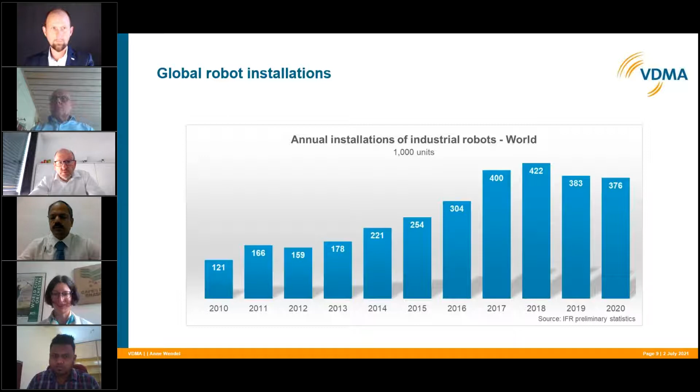New installations have more than tripled if you compare 2010 to 2020. In 2020, as I mentioned, there was a minus 2% due to COVID-19. But it's not as bad as in other industries and other sectors of the machinery industry. So, looking at the customer industries.

Industrial robots can be found everywhere. All major industries rely on robotics, be it in food and beverage, plastics, chemical, metal, or machinery industry. So robotics and automation is globally on a high growth path.

In 2020, something happened: electronics surpassed automotive as the largest customer. Electronics had plus 17% in new installations in 2020. Automotive, as we all know, is undergoing a transforming period, so we had minus 21% in automotive. But in all the other industries, be it food or plastics, we had an increase.

Looking now at robot installations in India — thanks to the International Federation, we have these figures so we can see how the Indian market has developed. Looking at the annual installations in 2020, more than 3,200 industrial robots were newly installed in India. Hence, again, an increase in the operational stock of industrial robots — that means how many robots are working in factories in India.

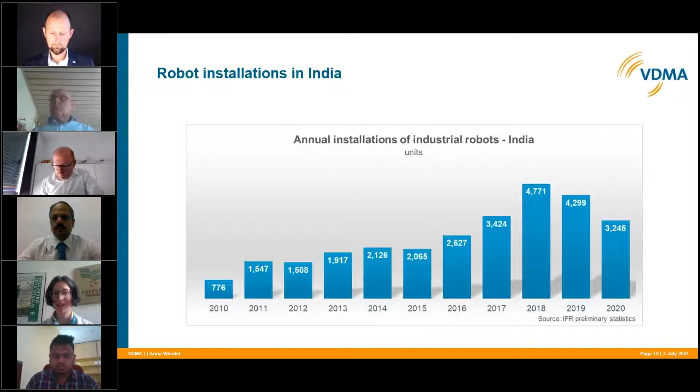That's not the slide I wanted to see, but nevertheless, operational stock, I hope you believe me, has been increasing over the last years. According to the IFR, by the end of calendar year 2019, we had more than 26,000 robots working in factories in India.

And if we look at the customer industries for new installations in 2020: 744 units were installed in automotive, 337 units in metal and machinery, and electronics and food saw an increase in 2020.

Unfortunately, we don't have figures about robotics and automation, about the machine vision industry in India or worldwide. However, I can share with you how the German machine vision industry has been developing.

Next slide, please. Go to the... again, the slide is missing. I'm sorry for that, but I hope you believe me.

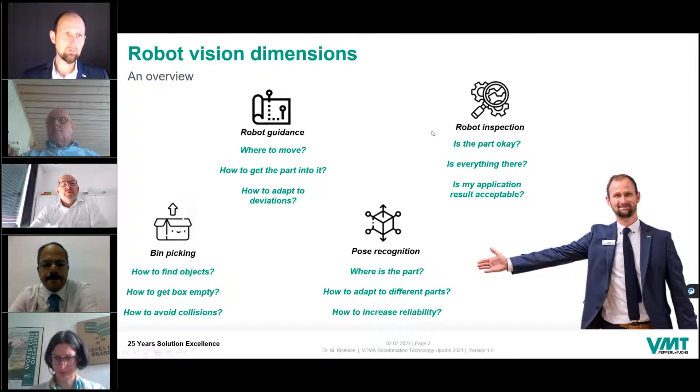So what happens if your parts have different shapes, but your robot path is programmed, and you want to adapt it to the current shape and moving path? And we want to dive into a huge topic about robot inspection, especially talking about 3D inspection. How can we use robot vision solutions to inspect parts? That is the overview, and now we go into it and talk about pose recognition.

Assuming you have a robot cell, a sports car, and whatever object, these examples are automotive because VMT is doing 80% of automotive vision solutions. We do 10 to 15% medical solutions and 5 to 10% general industry solutions. So most examples are automotive, but you can transfer it to any other solution or object that you have.

So we have a nominal position, there's a part. We have a multi-camera system, 3D pose recognition, using several cameras, let's say 4 in the edges of the robot cell, to create photos of an object, to calculate from the photos using markers in the picture - we will see that later - and a mathematical algorithm to calculate the current position of an object which is meant to be the same all the time.

So taking this red sports car, don't want to talk about a Ford Mustang here, but it is one. This is in the nominal position and you did all the robot programming. Everything is working fine with your first car. We call it the golden car. And your application path is fine.

Next car comes into your robot cell, and this car, due to conveyor effects, will not be in the same position. And we have to distinguish here, we are talking about a pose. So a pose means X, Y, and Z, Cartesian position, and additionally an orientation change. And that is very crucial.

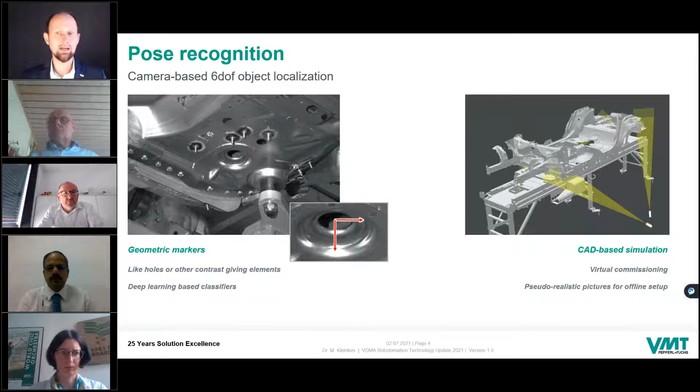You can do that in a CAD-based simulation. That is something going out of the commodity product which has existed for many years on the market, 6D pose recognition, into virtual commissioning, CAD-based simulation. Thus the next car, the next object which you're planning, which you don't produce right now, is fitting the current cell, the current solution, and how much can you do in the office and just load and update when you're on site to get everything running in a very limited amount of time.

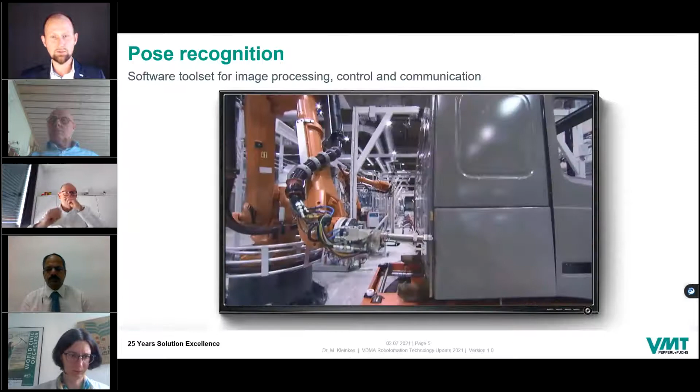And what you see here on the window is software showing these image processing algorithms, lights, cameras which are mounted, and here you see a demo application which we did for a truck manufacturer. For this sealing application, it has to be applied very accurately at the object, and this pose recognition has to be done to find the object in space to really hit, with an accuracy of a millimeter or even less than a millimeter, exactly the right position.

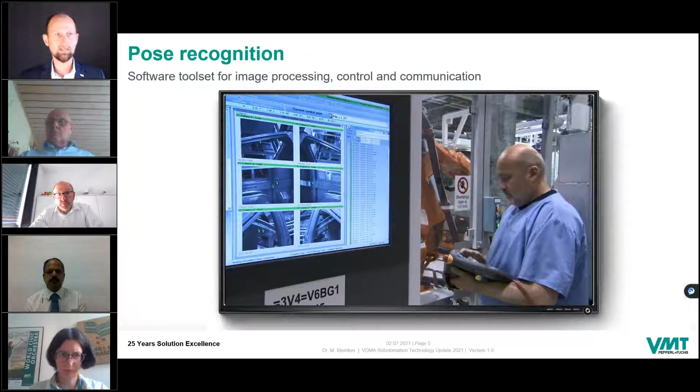And you can see that's a practically running system. From this kind of systems, we've got 1,000 and more running worldwide to do pose recognition. So that's the first, let's say, easy solution approach for modern vision technology.

Now we go one step further: bin picking. If you go to Wikipedia and type in bin picking, some keywords pop out of it. It means computer vision, robotics, end effector, poses, grippers, and all that good stuff. It is still a huge complex problem, and the theory means just take a robot, take your bin, take your parts, use a plug and play software, put a sensor on it, and there you go.

That is not the reality that we experienced. There are certain levels of problems. If you have very easy parts, very good lighting, everything is like planned in theory, it's easy to do, but have a look on that.

Those are parts for a German manufacturer of cars, and it is glossy, shiny, chaotic. These parts are in every possible orientation. If you want to grip them magnetically, they stick together and you don't get them out of the box without any collisions, and that is bin picking.

Bin picking is not taking a sensor, taking a plug and play software, and good luck. Bin picking is a various field of different elements, and that is my key message for this part of the presentation. It means you have to deal with a robot, create a good gripper which fits in the box and fits to the software, and establish your interfaces to your PLC, to your safety environment. You have to make a good cell layout so you have enough space, room for the robot to move properly, to get all the parts out of the box.

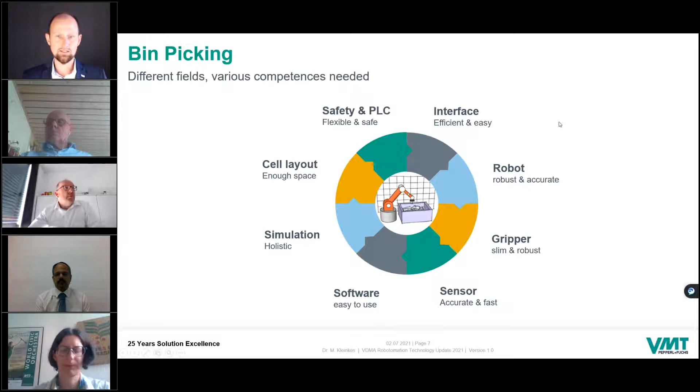To give you a small insight into how we did that bin picking, that is a lab setup with a very easy sucking gripper. You can see there was a 3D fit, and what you see now is a very crucial part: taking a part out of the box and putting it into this fitting element, which has a play of 0.5 mil. That's a very delicate task, because most of the time the gripping process itself is not accurate enough that you can put the part down with the accuracy you see here in the video.

That is one part where these bin picking solutions get very complex, and a good software package, a software platform, is needed to run a bin picking system properly.

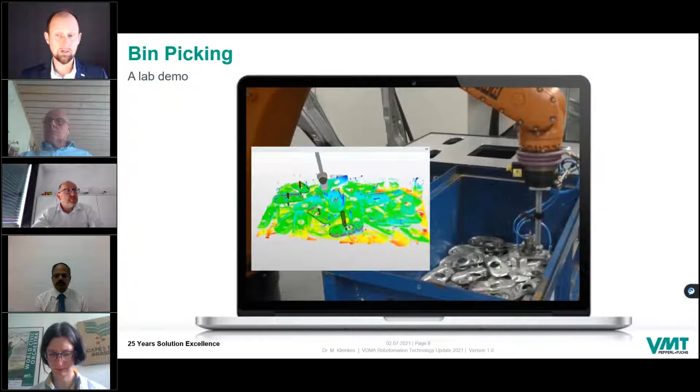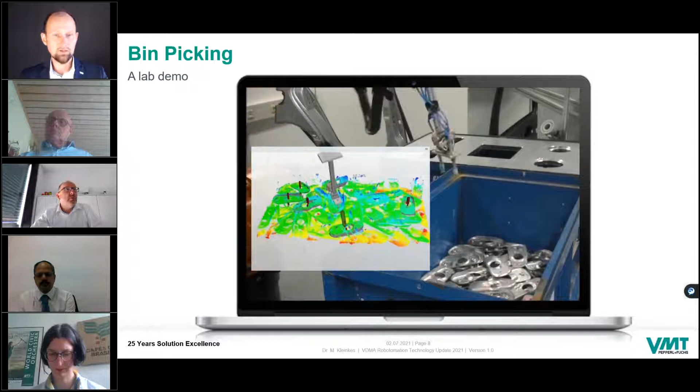What you maybe see is a rotating laser over the bin. So the sensor in these solutions is also an element which decides about success or no success. You need good resolution, you need good light reflection and robustness relation in your sensor. You are not helped if your surrounding lighting conditions are very bad and your sensor can't deal with that, so that you're not able to fit, like you see here in the window, the CAD into the point cloud that you get out of a 3D point cloud sensor to do this kind of bin picking.

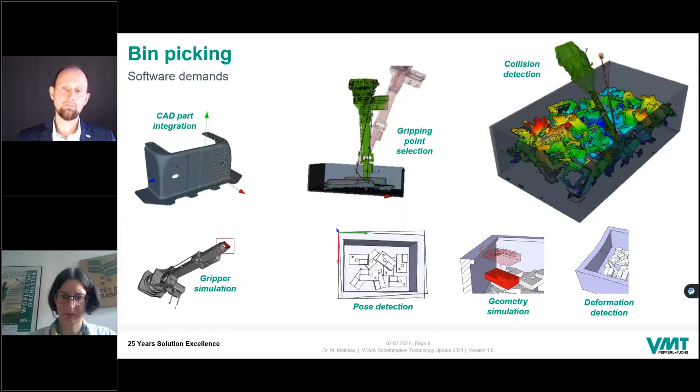That is the basic approach of bin picking systems. There are several points I want to give you. If you think about bin picking, don't just think about can I see the bin and do I have a robot and that's it. It is a huge and multifaceted topic that you should consider.

That is always the equilibrium we try to achieve. On one side, every single problem, every single customer is unique, so unique solutions are preferred. On the other side, you want to approach standardized solutions in vision applications to drop price and get synergy effects. That is the equilibrium we reach, finding the best level between individual solution and standardized product.

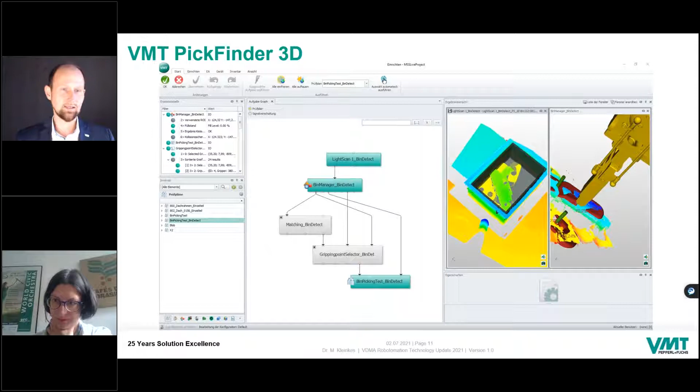Basic platform, one-time software learning, different solutions with the same software platform. That makes it easy to change between different applications while still resting on the same platform, like using Excel on a Windows system while at the same time using Outlook and other software. The platform is always the same.

Jumping to the third of four topics, inspection is something really huge. I would need several hours to explain to you the different elements of inspection that we do. Here I roughly scratch the surface to give you a glimpse into what we do and what modern vision, robot vision, is doing on the market.

What we do there is with the second platform we use. We take pictures and elaborate these pictures with taught-in templates that you can put into the software. We can measure distances, sizes, diameters. We can check positions in relation to the picture, whether it's in the right position or shifted a little. We can read data matrix or barcodes. So all different tasks needed to inspect a complex element.

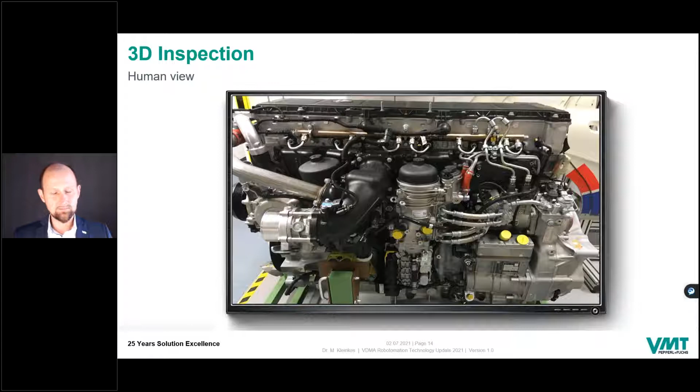So let's take a grayscale camera, a classic inspection grayscale camera. Looks nearly the same, but with a completely different approach. Now we still have a picture, but we as humans have two cameras, a left and a right one. Some of us only have one eye, but most of us have two eyes, so we are equipped naturally with stereo vision and with a huge brain capacity to process what we see.

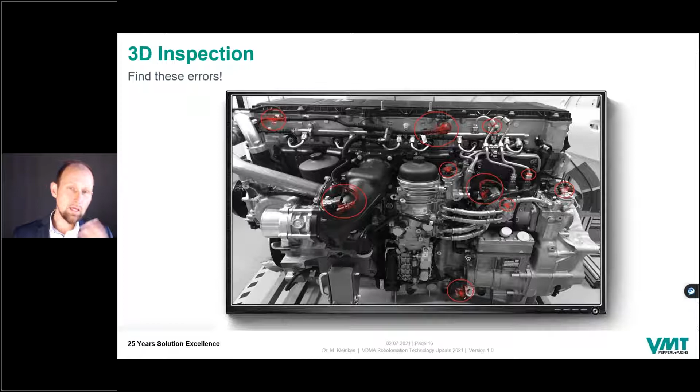And now we dive into the 3D world. If we use a 3D point cloud sensor and take a snapshot of this object—say the first object, which is perfect, which is controlled with a lot of time, patience, and love, we check this part about completeness and everything is fine. This is a golden reference, and the next 200 parts should be looking like this one.

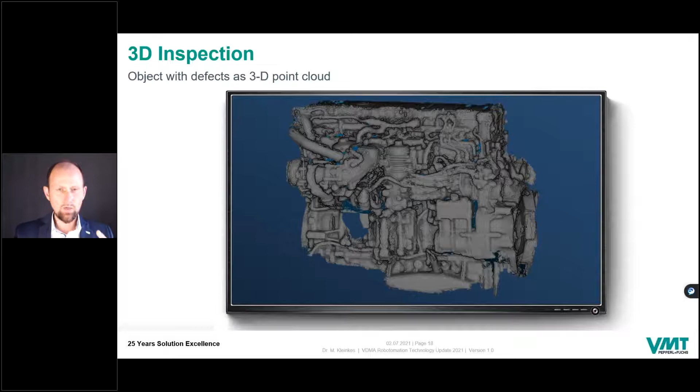You can take a 3D picture, a point cloud like you see here, and for the next part you do the same. This is the next part, looking nearly the same as the first one. Now we bring these two 3D point clouds together. We match them, and then we see where they change in their geometrical size, where we have deviations. And that is exactly what you see here.

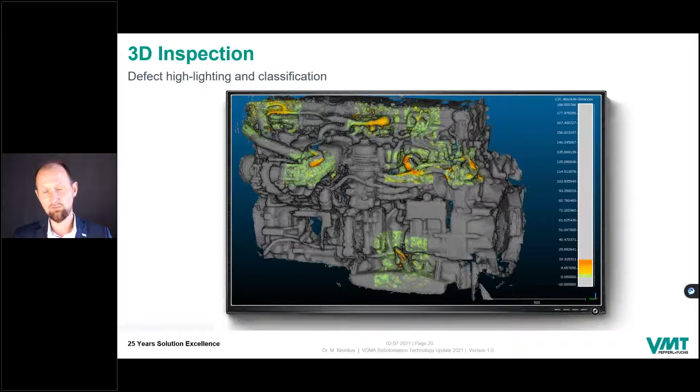But let's take another one, a turbocharger, same problem, 3D inspection. When you begin to rotate the part a little bit—and I hope you see the rotation because of the bandwidth and the presentation here—then you get an impression of how 3D works and how you can highlight areas which are not perfect, which are the result of a complex 3D inspection here.

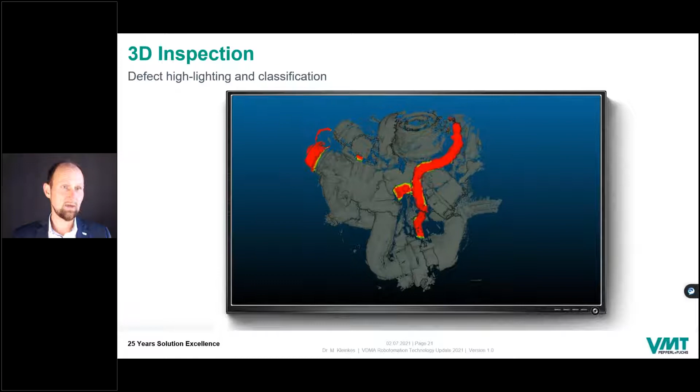That was chapter 3. Jumping into chapter 4, the last chapter, and then I will finish. We need 5 minutes and we are through. Robot guidance.

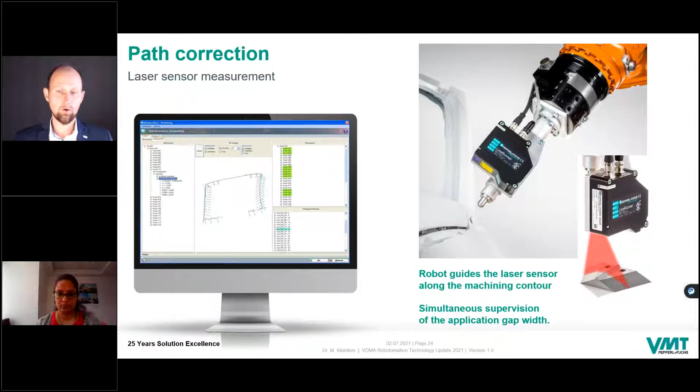And with that tool, you're perfectly able to act agile on every part deforming that comes up into your production process. Look at this, it's a video which doesn't start here.

It's a video where the front hood of a car, which deforms with every car, is measured now. That is the measurement process. It's very fast, pack, pack, pack, pack, pack, just single shots of laser line measurements.

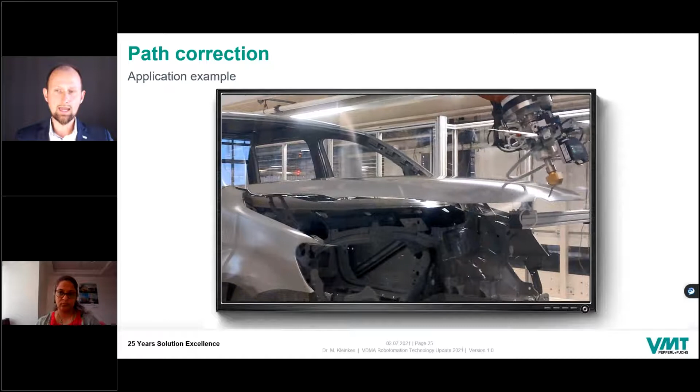And now there's the application. You see the nozzle perfectly going along the hood, and each hood has a different deforming. One millimeter is a lot in that process. Then you begin to scratch the nozzle, and you increase the risk that you break it and stop your process. Breaking is not the main problem, stopping the process is the main problem.

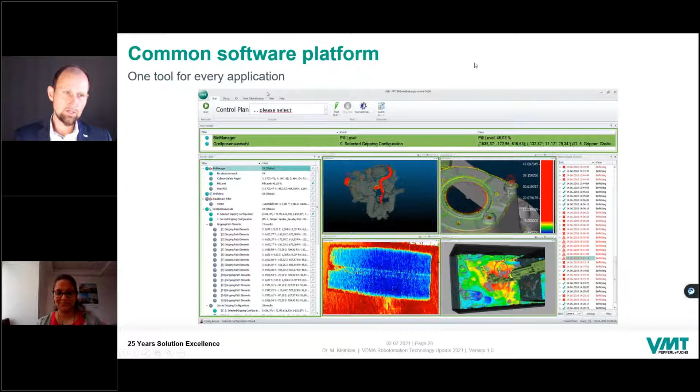20 minutes was the goal, 20 minutes were done. I'm thanking you from my heart for your attention.

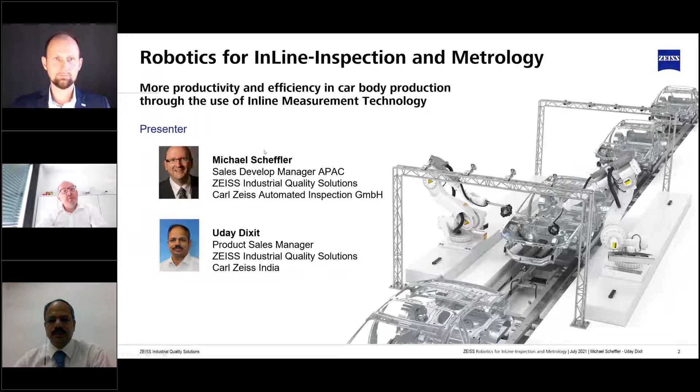As we are short on time, I will already show you the first slide. What we are seeing here is a somehow symbolized representative automobile production site, with different areas having different requirements for quality assurance. We have, for example, the tooling, the press shop, parts production in the body shop, serial analysis, measuring center, body shop, paint shop, and assembly. You can imagine that in all these areas we have really different requirements.

And this you can, of course, not solve with one single sensor. So what I want to show here is that we need a certain construction kit or tool kit of different sensors which can be applied on robotics for those different applications. We have, for example, an AIMax sensor for feature measurement, AIMax cloud sensors. We will show you AIMax twin sensors for the application of flush and gap measurement, AICell trace where we can also do correlation-free inline metrology. We need really different strategies for different manufacturing processes along the complete process chain in the car body manufacturing.

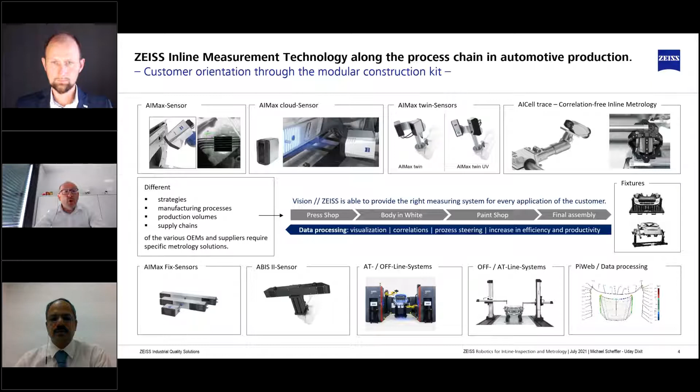When we go through this, I will not go too deep into different applications, but give you an overview. I will do it in the form of case studies, and the first one will be a sort of geometric measurement for inline inspection.

So when you see automotive production, this is the inner of an underbody. The importance for the inline inspection in this area of production is to assure later assembly. The features that need to be controlled here have function-oriented dimensions, because those are critical features which need to be controlled 100% on each car. If any deviation to the defined tolerances is detected on the line, the line will be stopped, or it will be sorted out for immediate rework.

But also, as we heard in the presentation before, it is better not to stop the line. That means with some statistical analysis, you can even recognize trends in your production, and then you can give a trend alarm. Even before a failure occurs, you can optimize your production processes, and you can also do some predictive maintenance on your production.

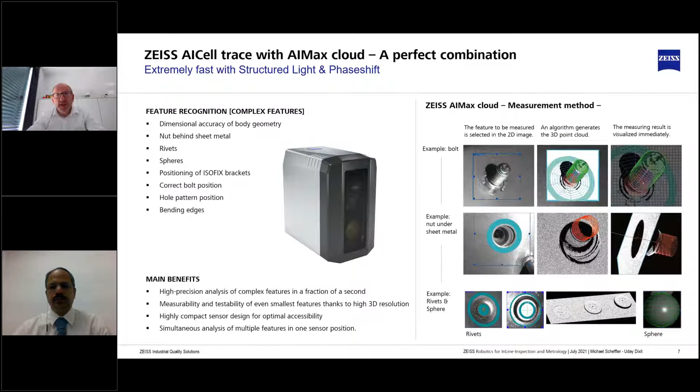And you have seen here the holes. One sort of sensor which is doing this we call the so-called AIMax Cloud. This is a very compact sensor which can reach different areas at the car body, for measuring features like holes, like slots, like also like rivets. I will show you now a real video out of automobile production, and then we will hear how the customer is also working with the sensor. This is from the production of Volkswagen in Poland, where they are doing the Crafter production. I think we can go now into this movie.

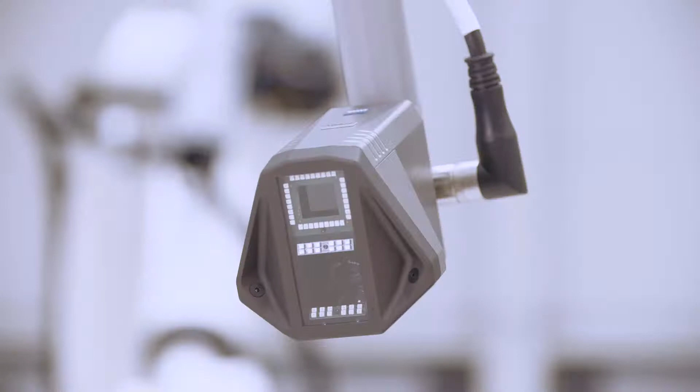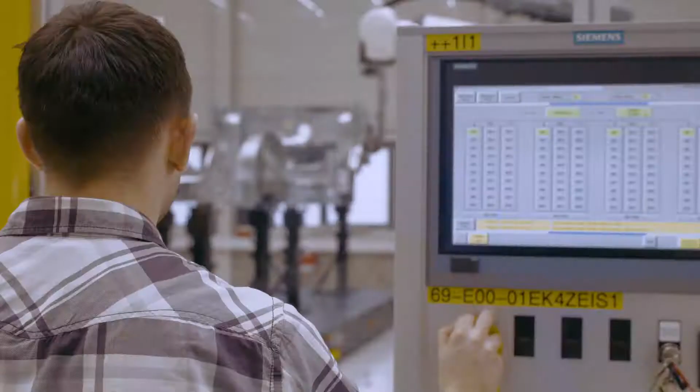The VW Crafter is manufactured at one of Europe's most cutting-edge production facilities. 100,000 Crafter vehicles available in 60 different versions will roll off the production line at the site in Września, Poland, which opened in 2016. Quality assurance is crucial, which is why the site has a state-of-the-art measuring lab. Here, the robot-controlled Zeiss AIMax sensors are programmed by VW engineers for use in production. The AIMax sensors combine 3 optical inspection methods for measuring complex geometric characteristics, including special boreholes, holes, screw threads, gaps, and flush. VW opted to leverage these benefits at multiple locations in the production facility. We're using 5 optical systems here at our site in Września. What is so special about this setup is that we have inline systems performing 100% inspection in production, as well as an offline station in the measuring lab where we write the programs without interrupting the manufacturing cycle. This way, I have enough time to optimize the programs and then transfer them to the inline stations. And it's just like Windows - all it takes is one click. Once this is completed, the programs from the measuring lab are used at the inline stations to check every part, from chassis or side panel all the way to the car body. This ensures process reliability throughout the production cycle.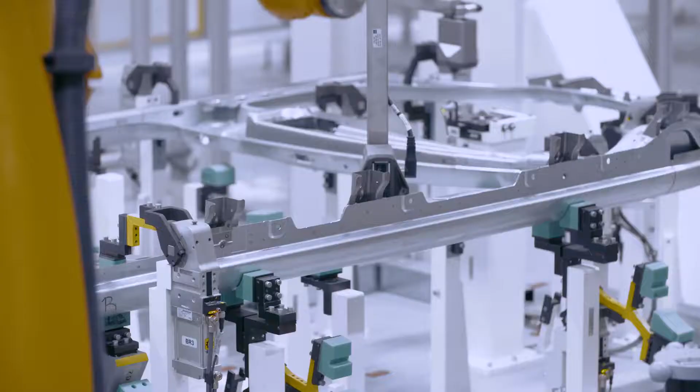The sensor we use is really compact. Although it contains so much technology, the sensor head is quite small. It even features extra illumination, enabling us to measure pressure bolts, which isn't possible with other sensors. We're able to access different areas of the car, including the interior area and difficult to reach corners, which makes it very effective.

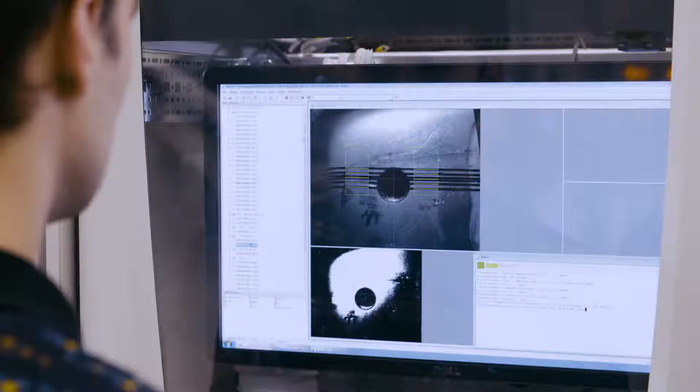However, the system does more than just monitor the strict VW quality standards. The advantage of the system is that we don't just measure geometry, we also see it in the form of photographs, which are being taken constantly. To take one example, these photographs allow us to inform the operator that there is too much glue on a mounting hole, which can then be adjusted. This is a lot faster than the proverbial 1,000 words or an email, and it's a really practical method for visualizing defects in a way that's clear and comprehensible.

Okay, thank you very much. So I think this was, let's say, okay, going on here. We will now show you also, let's say this was one sample from the Volkswagen Crafter production in Poland. My colleague Uday Dixit will now show you some applications which we are doing directly in India, to show you some specific references from India. Thank you, Michael. Thank you for a nice introduction.

So we are wondering whether this can be used only for automotive applications, or if there are other industries where this technology can be used. We would like to show you some videos for other applications. You can run this video.

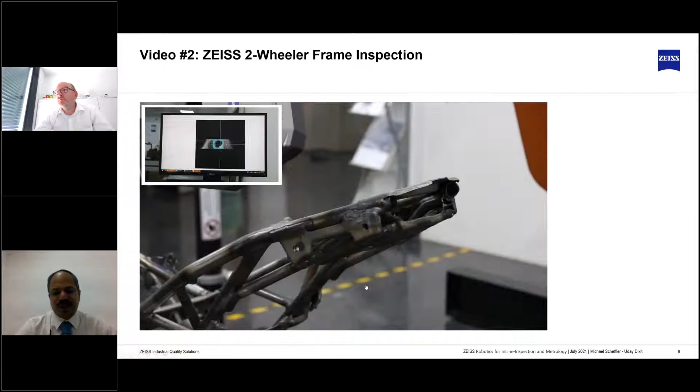One industry is the fabrication industry. Here we have shown an example of a motorbike frame, where around 30 or 40 brackets are welded, and the presence and position of each bracket or element is very important before it goes for assembly. You can ensure everything is perfect as per the design and no production time is lost just because one bracket is missing, or one hole is misplaced, or one bolt is not straight. So everything can be avoided by not sending a wrong part into the production line. Here again we have shown an example of the AIMax cloud sensor, which digitizes the whole feature and captures point cloud data. The results are much more clear, and the quality of inspection is highly reliable. As you can see, even a small thin cross section of a pipe can also be captured here.

You can see the quality of the point cloud data of various hole positions. Even if you want to see if there are threads inside the bolt, or if there are spatters inside the bolt which could cause some assembly problem, this can also be detected very easily. The whole system can be installed right on the shop floor, and the black artifacts, as you see here, take care of the temperature variation during the day, so the results will be very reliable throughout its inspection cycle.

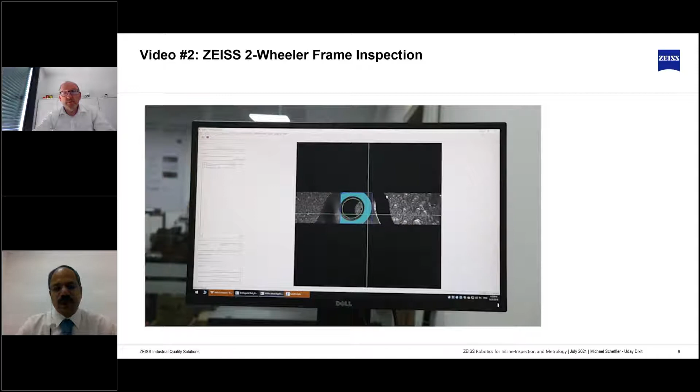Okay, we go to the next sample.

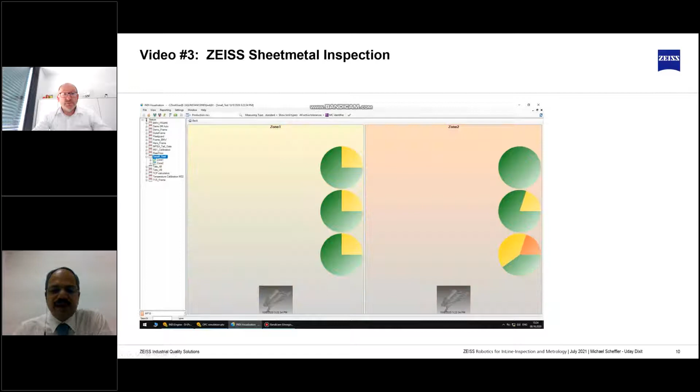Another example could be small sheet metal parts, stamp parts, which also go into various assemblies such as white goods products, where you want to see whether each and every operation is done before it goes for assembly, and it can also be detected. The results can be superimposed on a CAD model for very simple understanding. You can also have complete process control; for example, if some hole is getting deviated slowly, you will get warned before you produce a not-okay part, and you can take corrective action beforehand.

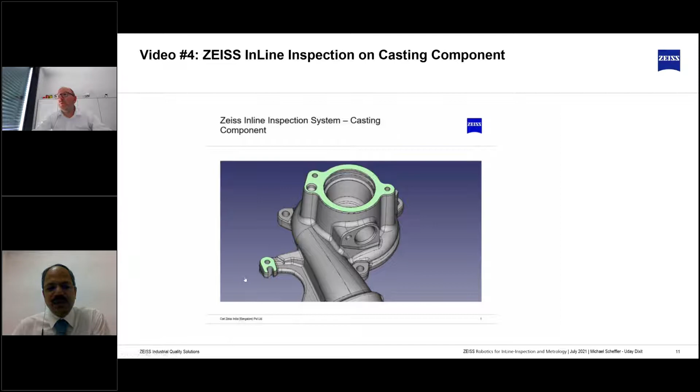Another example could be a casting part. Before you send this part for machining, you want to see whether everything is within tolerance and you don't have anything missing or less material, so you're not losing money in the machining process. So 100% inspection would be possible right on the shop floor with reliability. Besides automotive, we showed you application in the fabrication industry, stamp parts or press parts or casting parts.

Over to you, Michael. Okay, thank you. Now we come to one application, which is called the flush and gap application.

This is now a case where we are really looking at the importance of quality perception. Customers all over the world in the meantime have an extreme awareness for perfect flush and gap dimension, and this is also seen as a sign for the quality of the whole production. But of course, there are also functional requirements, like a good gap being important for the tightness of the vehicle.

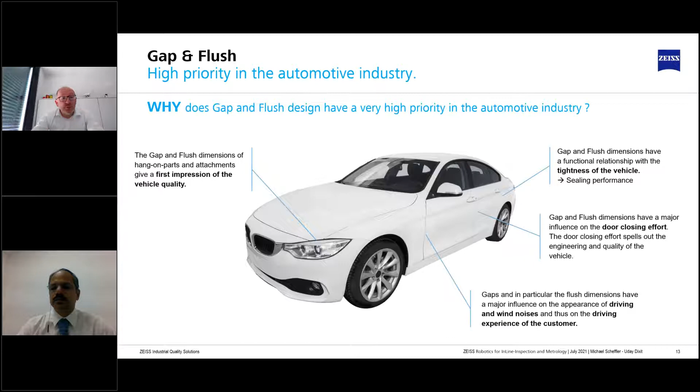We have seen in the VMT presentation the sealing performance, and this is important for door closing effort - it's also part of the perception of how a door is closing. Of course, driving and wind noises are important functions assured by good flush and gap. I will show you how flush and gap is typically performed in different areas of car body production.

We have the necessity to control this in the body-in-white area, and also in paint shop and final assembly. One reason is that each department wants to sell its part to the next department, and it should be okay. What's also important in a smart factory is to combine the measurement data derived in body-in-white, paint shop, and so on, into one central database, so that if something happens, you can derive failure analysis or the origin of the failure.

This is done by different sensor variants. There are thin sensors which are beneficiary in price. For the AIMax here, we can use the Zeiss AIMax Twin, which measures geometric gap and flush on painted and on metal surfaces. We also have the AIMax Twin UV sensor, which is able to measure even on glass or transparent surfaces.

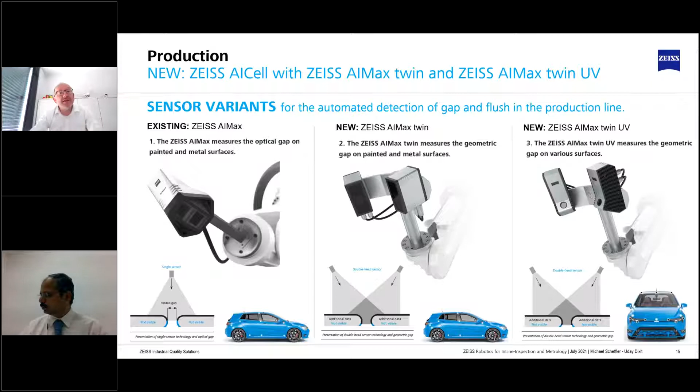I will show you one sample, this is from the Opel factory. There you will also see something we've seen in the presentation before.

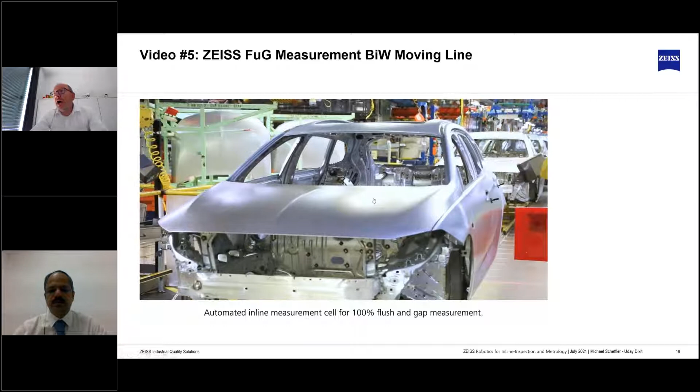Now it comes - we see here the flush and gap measurement at Opel in Rüsselsheim. You also see one technology package that's important because we have a line that is not stopping, so there is a continuous flow of the car. Here we have to do the measurement with alignment of the car and position recognition, so the robots can follow the car to measure at the reasonable positions for each flush and gap measurement.

Here you see the car on a skid. Sometimes the cars are also freely positioned on a transport belt. We will see in the next technology presentation some collaborative robots maybe doing this as well, when people are around.

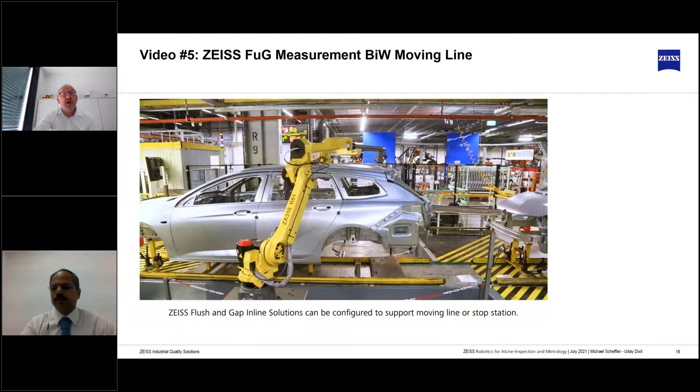These are the results which are typically visualized in the next station, so that the workers can do some rework, specific rework on the parts where they have seen some failures.

Another important inspection in the automotive industry is surface inspection. This is also a matter where we have the quality perception of a car. Here we have the situation, like we heard today, that it's important to detect a failure as early as possible in the process, because at the beginning, when you have stamped parts, they cost only one euro - if they have a crack or any defect, throwing them away is very cheap.

When you are further along, in the already pre-assembled or completely assembled car, and you find a failure, it gets very expensive to do any rework, or even if you have to throw away the car, then you have very high damages.

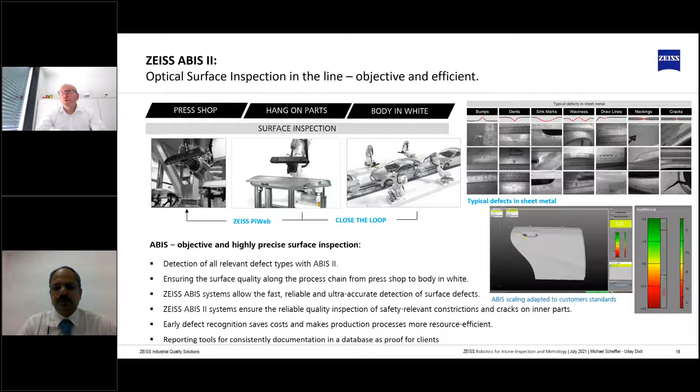What you're seeing here also - when you have a surface defect on a metal sheet, it's very difficult to recognize. Technicians detect them with grinding stones, but this is also time consuming. After e-coating you may see a little defect, but latest when the car is completely painted, such a defect surface becomes very obvious to the customer, and then you really have a problem. We nevertheless have solutions.

I will show you on this screen where we are doing surface inspection, as the sample of a complete car body at a MINI production, where you can see how this is done. I will just show you here the first cycle.

The car comes on the transfer bed into the measuring station, and you see here that 4 robots equipped with an ABIS sensor, which is specialized only for surface inspection, go very fast over the car and inspect those areas which are very important for the customers, because if there are any defects later, it's very visible to the customers. So the complete car body's visible areas are inspected very fast.

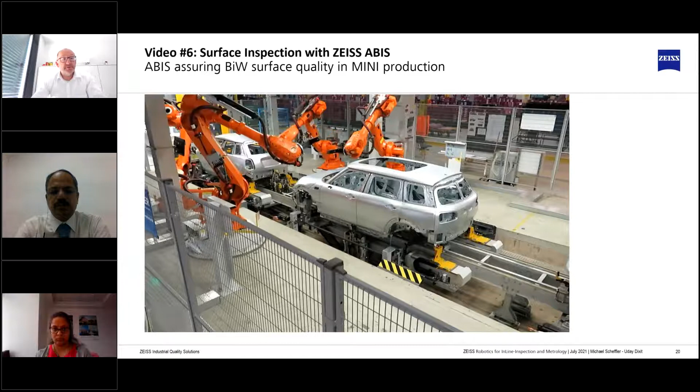Then typically after this station - you see here there is still some manual work - but after that station, the car is mainly sent to the painting area and moves on to the next department.

Another sample I want to show here is complete surface digitization. Here we see an offline robot station from GOM, where we are measuring complete parts by complete digitization. Why are we doing this? I think it's very interesting to get really a digital twin of the part, and also to do virtual assembly of digitized parts, for example a hang-on part, to see which hang-on part fits into the sidewall of the car, and then achieve the perfect fitting of the measured components to that car.

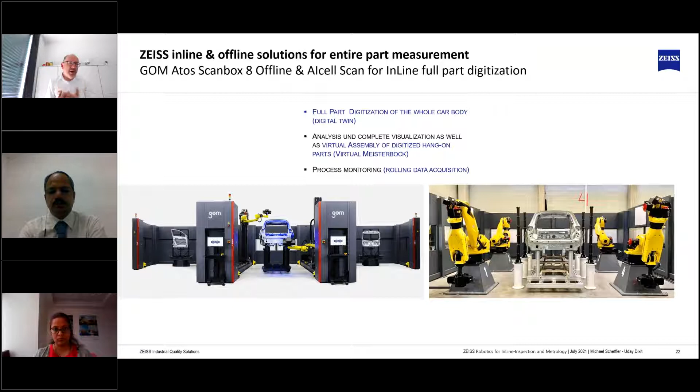Of course you also have some process monitoring. What we are currently doing here at ZEISS is putting this offline station into the line. You see it on the right picture, where we are preparing these robots, empowering them for 100% inspection in the line.

Why is it interesting to have 100% inspection? For example, you can do time-lapse analysis of a component. When you measure each part, you can really see how the failures are developing over time. This is a so-called heat map or weather map, where you see the deviations over time, and you can see failures in the pressing or stamping department, where they are coming from, and in what direction they may be going over time.

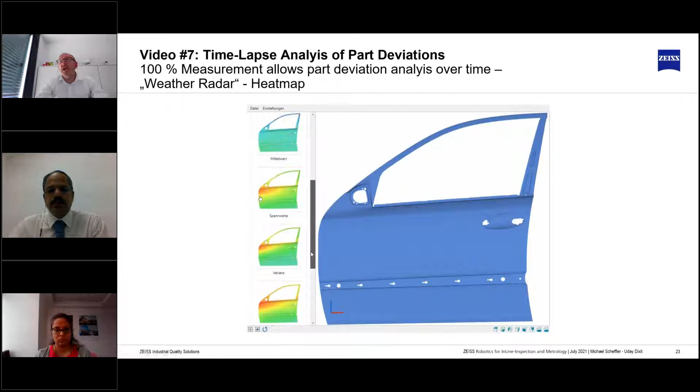You see different items that can be evaluated, like the range, the mean value, the variances. Here you see currently the ranges of a failure over time.

So just as an impression, as we are short on time, I will go to the next slide.

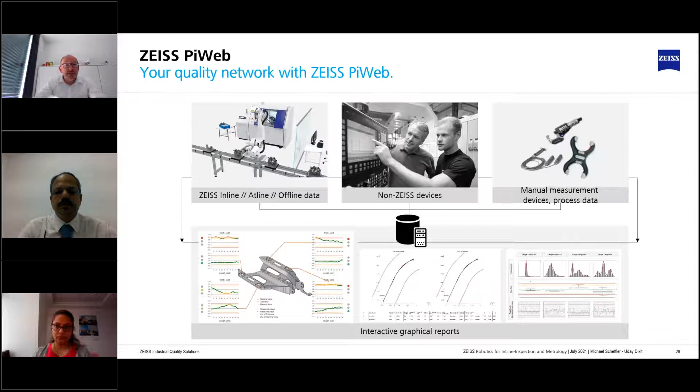I show you in this picture a correlation for inline and offline data, but this is also representative to look, for example, at how changes in process parameters may have an effect on your production, and then you can make correlations between process parameters and the outcome of the production visible.

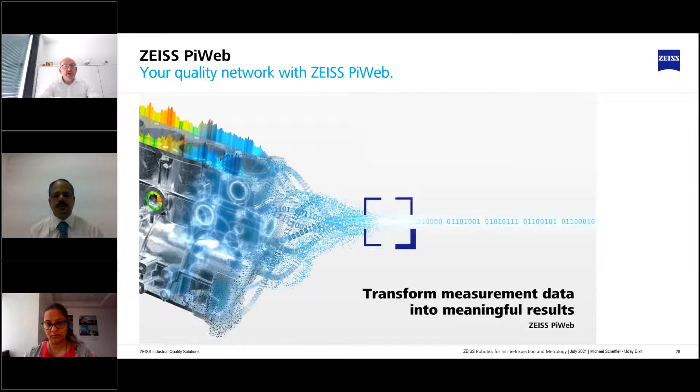So what we are seeing here is the necessity to transform measurement data into meaningful results. We've seen the three main pillars, the areas for flush and gap, ABIS inline surface inspection, and offline inspection. We also currently have a trend of not only inline inspection, but also bringing metrological accuracy into the processes.

I think this is the next step in metrology, that you are not only decreasing the effort, for example for the CMM room, because you can do metrologically correct measurements in the line, in the production line. And here, this is my lead out. We are doing this here in Neubeuern, in Neuenstein, in Braunschweig, where we have dozens of robotic measurement cells to empower robots for metrology and inspection.

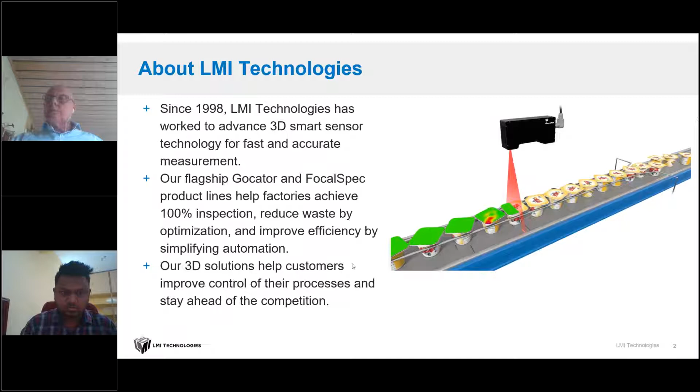Geoinformatics is an Indian organization. We have offices in Delhi in the north part of India, and then Bangalore and Chennai to cover the south part of India, and we cover the west part of India from our Pune location. Geoinformatics is a collaboration with multiple industrial organizations to provide technology to India. We have almost installed and commissioned more than 500 hardwares in the country, along with more than 100 software licenses for various sectors, mainly automotive, and also for aerospace and government organizations.

We do have a separate division for automation. We call the department Smart. There we give solutions embedded with 3D vision machine systems to make your current process easier, smarter, and more efficient. Over to you, Peter.

Robots have been used for decades in industrial manufacturing applications to perform tasks such as welding, part picking, metalworking, etc. But without vision systems to guide robot movements and actions, these applications were limited to performing the same or very similar operations over and over on precisely located parts.

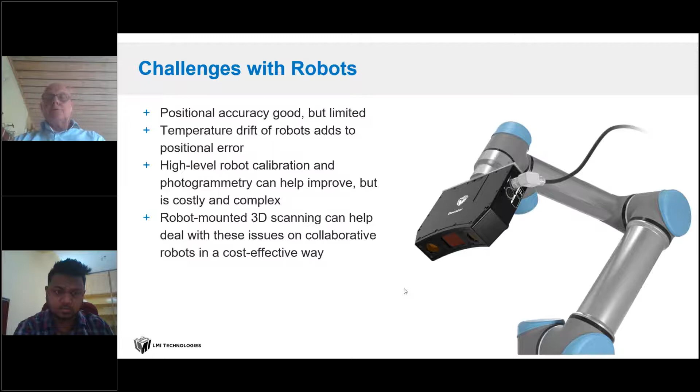Consider an application where 5 similar but not identical sets of parts need to be welded. Without the vision system, you may need up to 5 robot stations to do this, with each part mounted in a high precision fixture and then welded by a tool attached to a robot arm that moves with high accuracy and repeatability.

When a vision system is paired with a robot, one welding station can weld all 5 part types, as well as other parts. Each part doesn't need to be manually and precisely mounted. The robot will move to a predefined starting point, with the vision system then aligning the parts as required.

Low contrast objects would be typical objects like lettering or symbols on a tire sidewall - you would have a black letter on a black background. That's something that a laser sensor or a 3D sensor can easily pick up, using lasers and bandpass filters, which makes the sensor perform well in varying lighting conditions.

Pre-calibrated also means that the sensors are temperature cycled and calibrated across the total measurement range and field of view, to give excellent measurement results in engineering units within a defined temperature range.

LMI produces mainly 2 different sensor types: laser triangulation and structured light. Laser triangulation is typically the preferred option when the object is moving or the sensor is moving over the object. When you use structured light, it's important that both the sensor and the object are stationary.

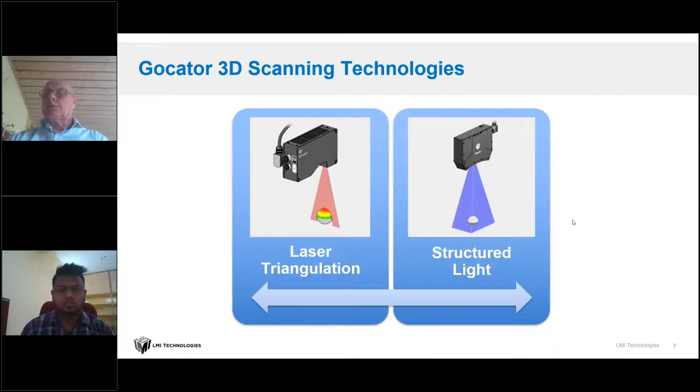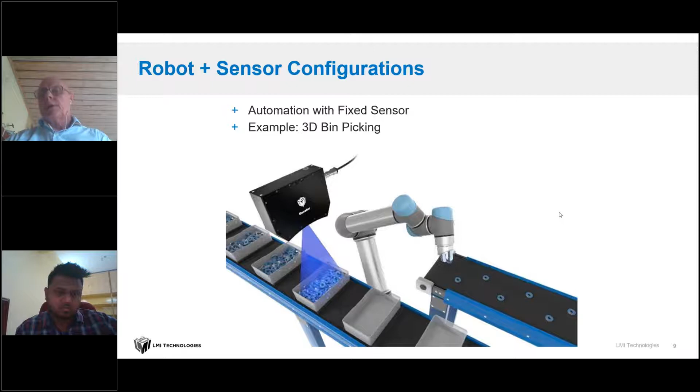When you have a sensor mounted on a fixed frame looking into a bin, or some sort of operation, you can have that sensor report positions of parts to be handled by the robot. For instance, when you put a sensor over a belt for bin picking, you measure different parts and convey them to the robot to be picked and put on a second conveyor, for sorting.

Or the sensor is fixed mounted over the belt here, and the robot picks the parts or subassemblies as they come, and puts them in the right orientation on the second row for further processing.

We've also heard of inspection and the importance of inspection with fixed sensors. That means the sensor is mounted on a frame and the robot actually puts the workpiece in front of the sensor for checking that the part is correct.

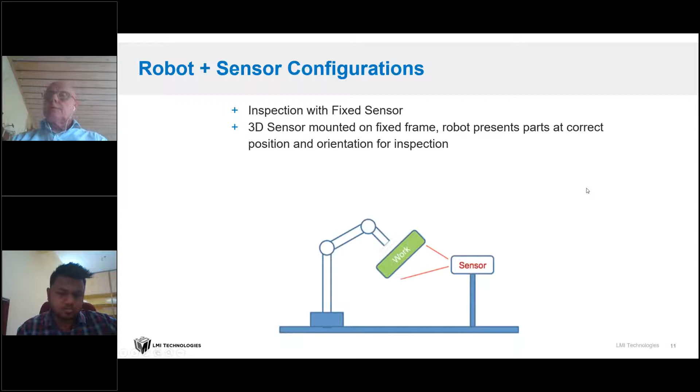Here we can symbolize it by just putting a dice in front of the sensor, rotating the dice and taking snapshots of each side. Then you get the fully inspected part, for instance.

Another automation optimization application would be to measure pies or pastries as they come down on a conveyor. They can be of varying height, varying diameter, and not 100% in the same position all the time. So the sensor is fixed mounted over the conveyor, measures each pie, and reports position, height, and diameter to the robot that actually cuts them into the correct sizes.

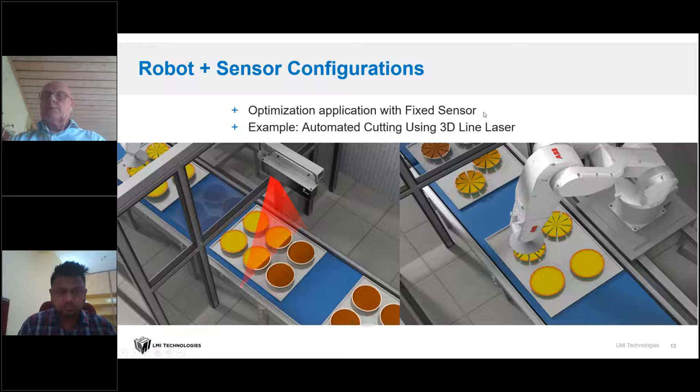Thanks for the information. I hope Peter and my other colleagues have shared a lot of information on how vision can be combined with robotics and make your entire robotic system more efficient and better in performance. These sensors, 2D vision cameras or 3D vision sensors, act like an eye to a robot. Generally robots are programmed to move to a particular location, but adding a vision camera or 3D embedded sensors gives real-time dynamic feedback to your robot and makes things happen in a better way.

This way, you can save a lot of cost on expensive jigs and fixtures which guide the robot to pick the part from a particular fixed location. Because of vision systems and 3D vision systems, your robot can now take dynamic feedback and have the freedom that even if the part is not at the very precise location, it can still pick it accurately and place it at a particular location.

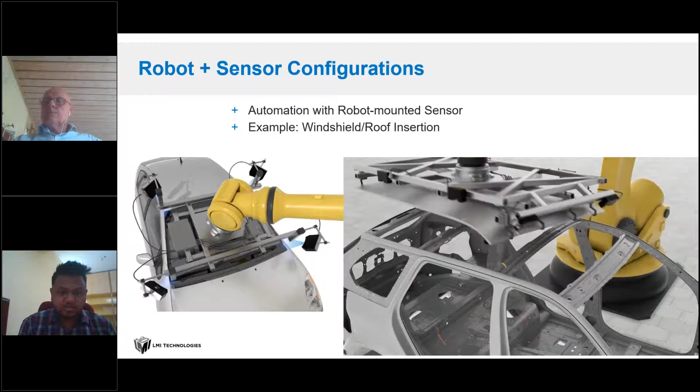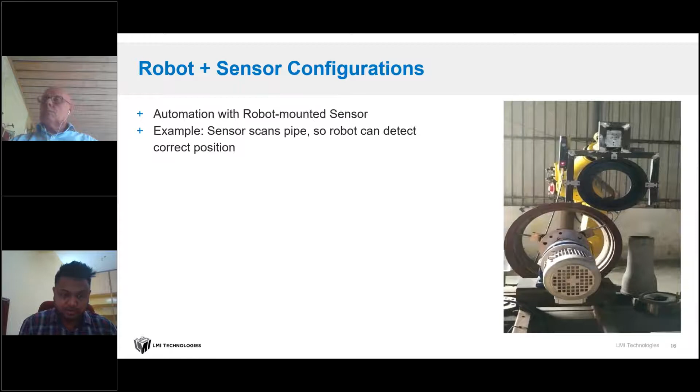Either the part is stationary and the sensor is stationary, or we can keep the part stationary and move the sensor with the help of a robot or a sliding gantry. We can inspect the part and place it either way: the part stationary and the sensor moving, or the sensor stationary and the part moving.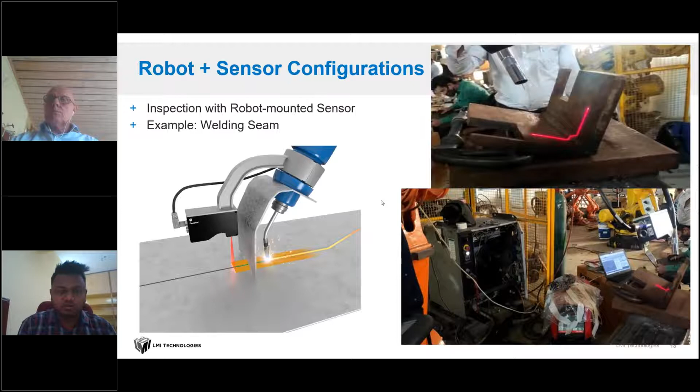As this is a 3D sensor, the advantage is they can not only do X and Y, but Z also. So you can measure all the depths and heights present along with the verification. And as I said, the live feedback is always going back to your robot controller or PLC, so you can continuously monitor your process.

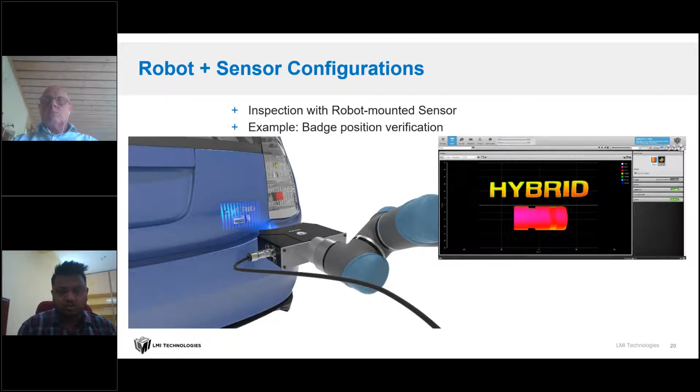We go to the next slide. So our sensor, Gocator, we call this a smart sensor. Why call this a smart sensor? Because it not only scans, it processes the data and has inbuilt measurement capabilities.

It is certified with UR, so we have a direct plugin available for UR. You can directly plug and play with the sensor. We also provide a support sample file, so sensors can be integrated with Yaskawa, Techman Robot, KUKA, and ABB as well. So almost all leading industrial robots, we can do direct communication without a PLC in between. It can communicate to a robot and provide real-time dynamic feedback.

Next slide, Peter. So all-in-one is, again, we call this a smart sensor. It not only measures, it scans, meaning it captures the data, it controls, it processes the data. So you're not putting any additional controllers to process the data. It also has a measurement capability.

It's a simple browser-based thing. You plug in, open any browser in your system, it may be Chrome, it may be Firefox. You can set up simple measurement tools like diameter, robot pose, distance or height, and feed it tolerances, and it can send you a direct digital output to your PLC or robot. That digital output, as a value or as a decision, can be taken, so it can directly give you 1 or 0 - okay, this part is okay, do this process; this part is not okay, do this process.

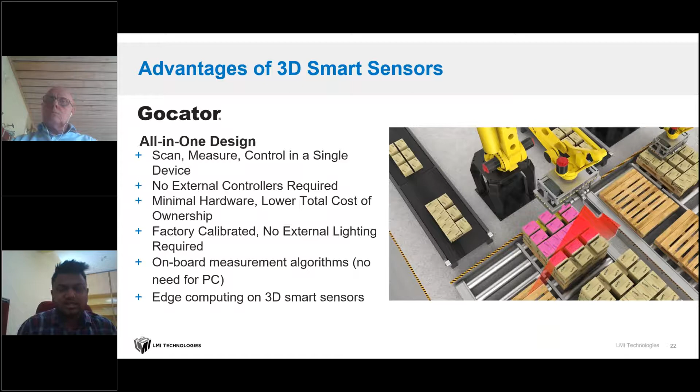Then again, these sensors are smart because they don't require a PC all the time to do any measurement. You can write the logic right inside the sensor and let the sensor work. So those algorithms and measurement features are present within the sensor, and it can do all the measurements required and directly send us a digital output. Go to the next slide.

We can help you out. You can use these sensors, try yourself, and see how easily we can create a program. Even an operator-level guy can come and simply drag and drop, create a logic, and done - you're good to go, plug and play and done. So that's why I conclude our presentation over here. Thanks for your time and listening to us.